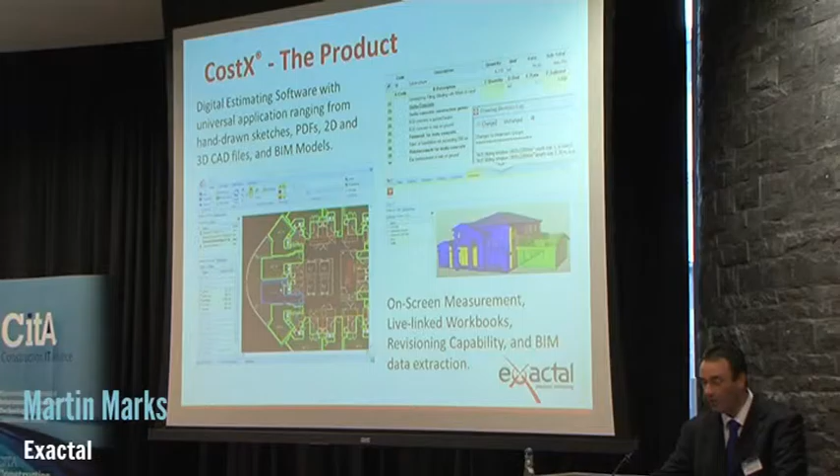Some of the key features of CostX: obviously it allows you to work with and extract measurement information from those file formats. The estimating side takes the form of hierarchical spreadsheet-like workbooks into which all of the measurement data is live linked between the estimate, bill of quant, and the drawings or models from which the quantities have originated. We also have a revisioning capability within the system, which means that when a revised version of a model or a drawing comes out, the quantities can be updated and the live link then updates the workbook.

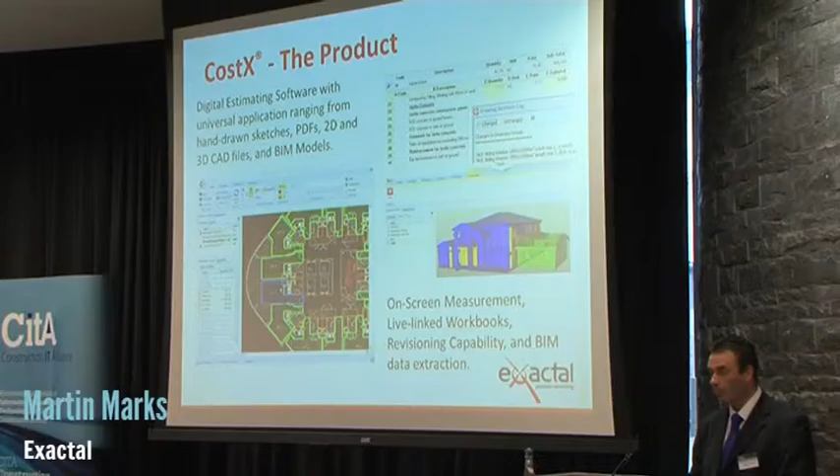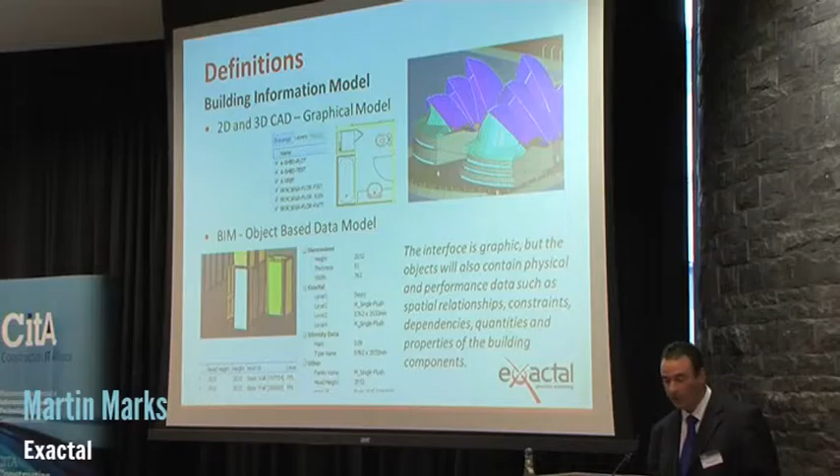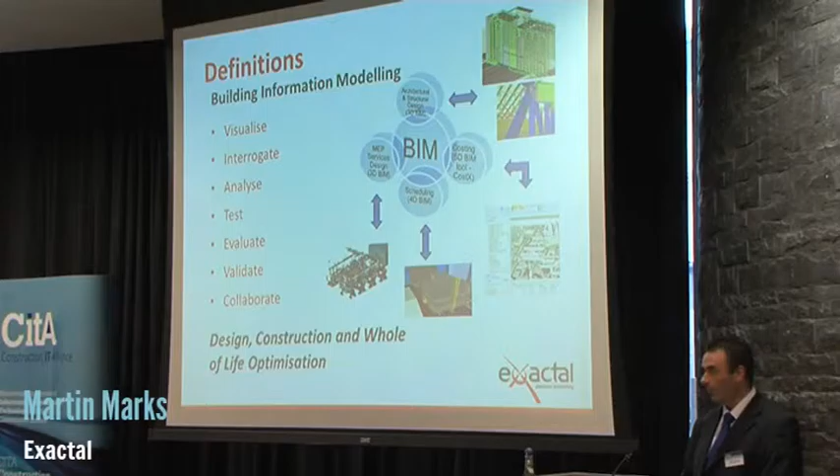So just to talk a little bit about 3D BIM and 2D. In terms of definitions, there are CAD files which could be 2D or 3D. However, a BIM model, so BIM acronym, one of the definitions is Building Information Model. With that, the interface is graphic, but the objects also contain data such as spatial relationships, constraints, and importantly quantities and relationships. Another definition of BIM is building information modelling, which is the process. So just some of the items listed out there. It allows visualization, allows the models to be interrogated, analysed, allows collaboration, all leading to a better design, better construction process, and a better whole life outcome and optimization.

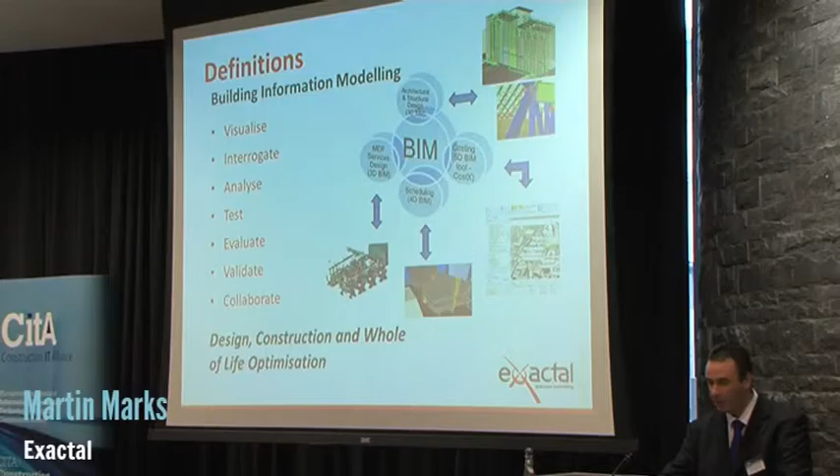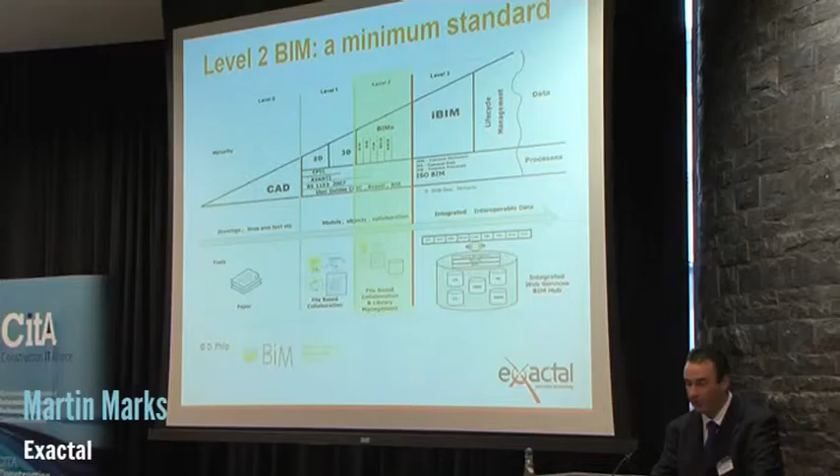We've seen this chart already. The UK government has mandated the use of level 2 BIM by 2016. So just some of the process and deliverables with level 2. There's been quite a lot of talk about the 3D BIM side of things, and COBie's been mentioned. But there's also a requirement for 2D information. For example, where a model isn't sufficiently detailed, or the model doesn't contain objects or object data for certain items that need to be quantified. So there will more often than not be a requirement to ascertain certain measurement information from 2D drawings.

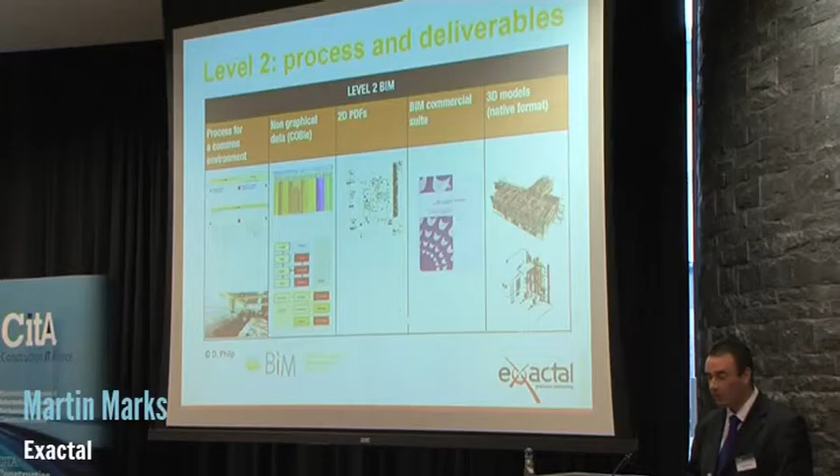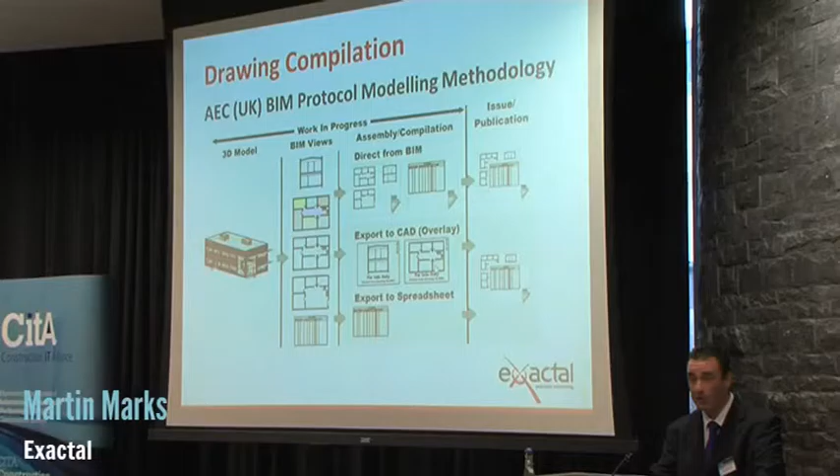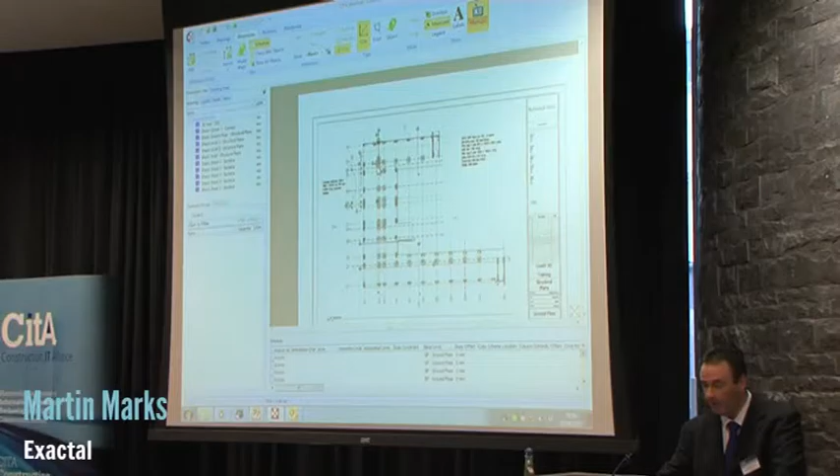So I'm just going to switch now into CostX and just show some of the key features of how we can extract information from the model, and how we can take a number of 2D measurements. So firstly, I've loaded this model in. This model has obviously the 3D view that you can see here. We also have within the same model file a number of the 2D views of the same structure there.

So the model itself, obviously it's made up of a series of objects. If I just look at the object properties, we can see here the model has information contained within it, so there's certain descriptive properties together with obviously certain dimensional properties. And within CostX we can harvest this information.

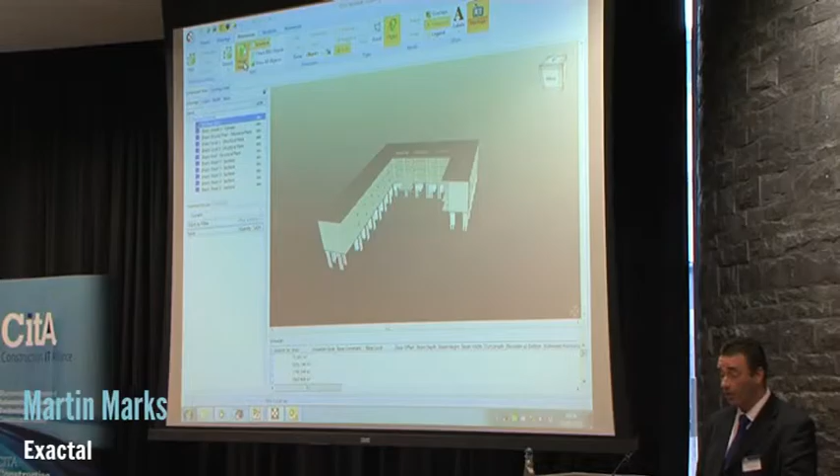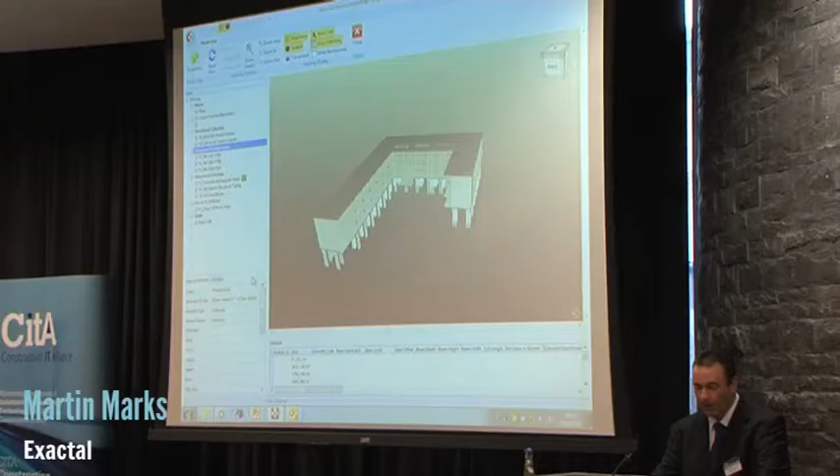So there are a number of ways that we can extract quantity data from the model. We have an automatic process which will just schedule out quantities from the information contained for the objects. We also have a method that we call model maps. Now with the model maps, basically what this allows the user to do is create a customized template with which they can access and abstract the information from the model.

So for example, they can choose which property field or fields they want to utilize to generate the quantities into. So that will determine how discretely or otherwise the quantities are extracted. And additionally, the users can determine which of the property-based values they wish to utilize from the model to generate quantities within the CostX system.

Additionally, they can also generate and utilize formulas within the model map. So that might allow them to derive quantities which aren't inherently included within the model, but can be calculated from a combination of the other properties. So the model map is comprised by creating a model map entry for the various required nodes within the model tree structure.

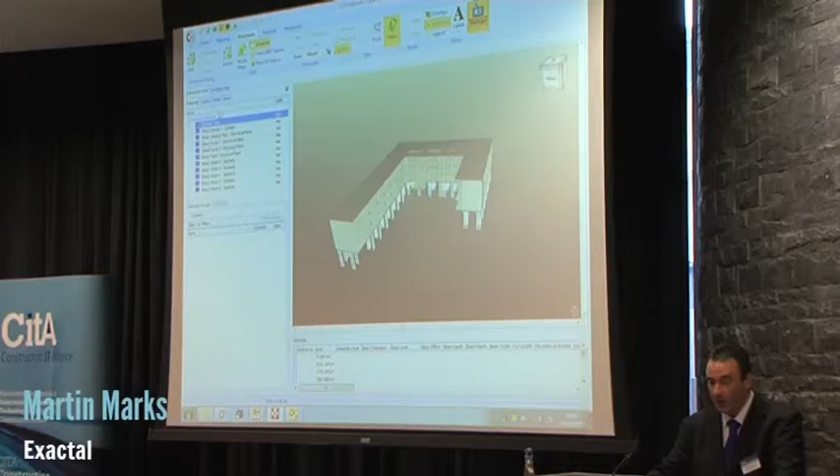So when the model map has been produced, we can then import quantity data from the model, and this can be done in a number of ways. Firstly, the user can import data on a selective basis. So, for example, I've isolated the floor items here, and if I just import the quantities at this point, you can see what that has done is created, in this case, 5 dimension groups which detail out the quantities for my various objects which were shown. So that was the floor objects.

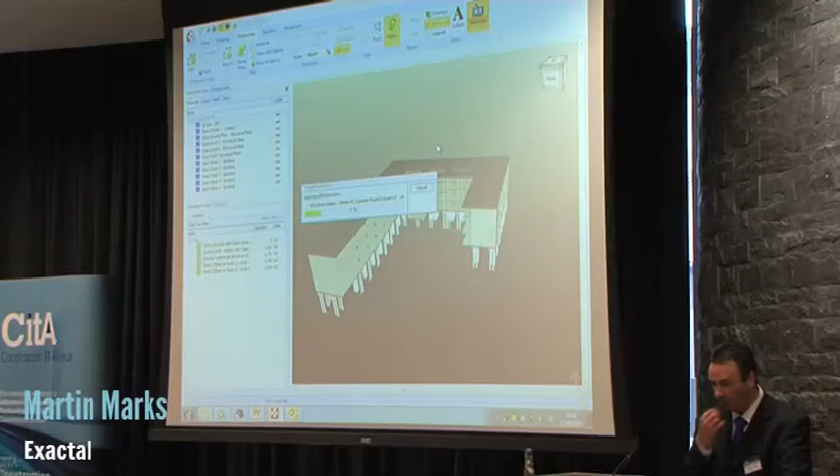Of course, if the entire model was displayed, then we can import quantities for the entire model en masse. So this is just running through and pulling in quantities which you'll see appear as dimension groups within the lower left-hand corner here in just a second. So if I just expand out these folders that contain the various dimension groups, we can see here we have the quantity data which has been generated from the model.

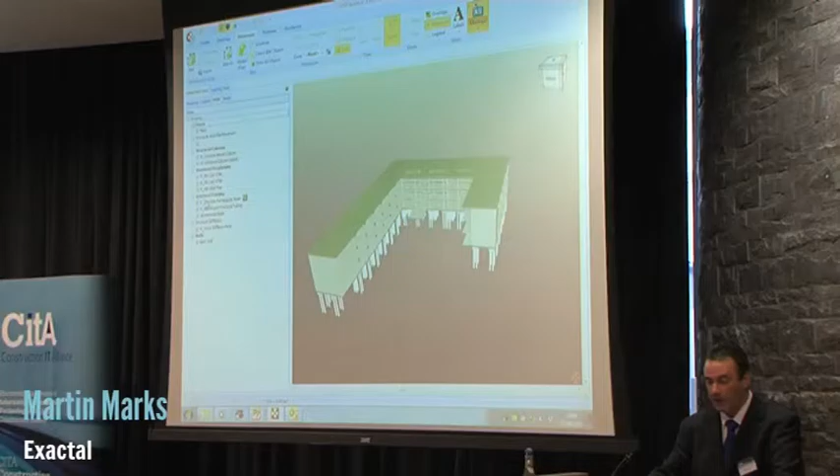Now, in addition, the user can also export a copy of the schedule data into Excel. And within Excel, the user can then add their own properties and their own data to the objects. So in this particular model, I have added data for the likes of the beam depth, beam height, beam width, and such like. When that data has been added within the model, that too can be accessed and used to generate quantity information with the model map.

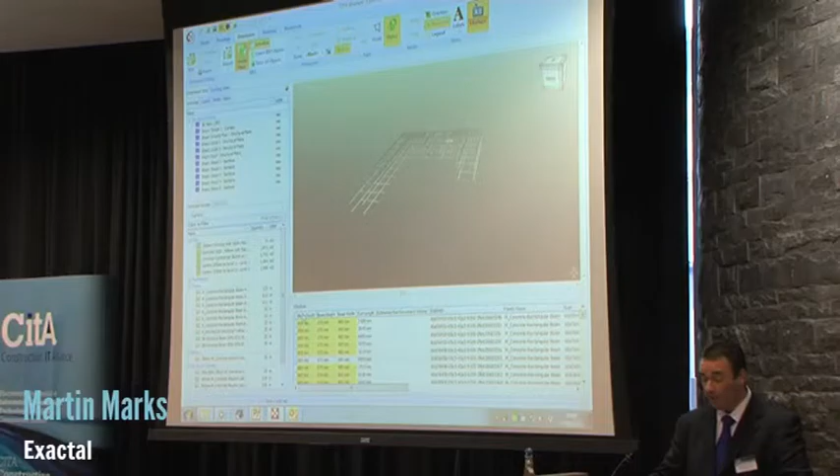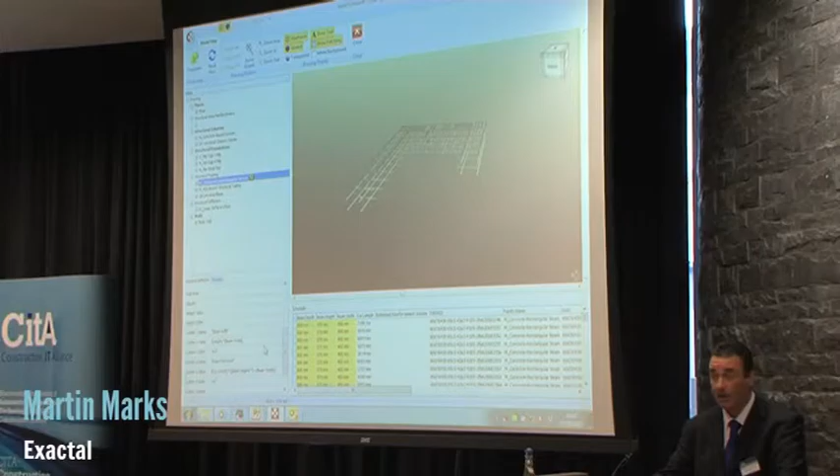So I've created a model map to utilise that to generate my beam formwork data. So within this model map, I've basically utilised the additional data which I've added to calculate my beam formwork quantity data. So if I now import using that model map, we'll see in a moment we'll get an additional folder which will be created together with the dimension group containing the information I need to quantify my formwork items.

So there's my folder, and here we have the dimension group which was created using the additional data which I added to the model. So you can see there from the pop-up hint, I've calculated my beam soffit and my beam formwork data.

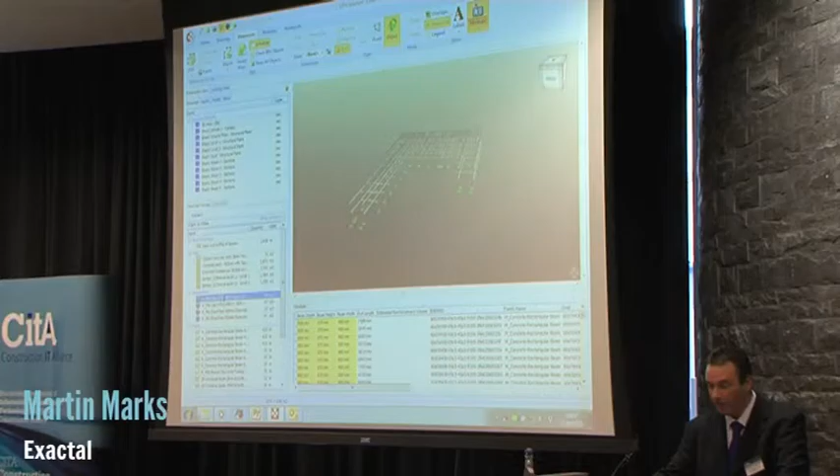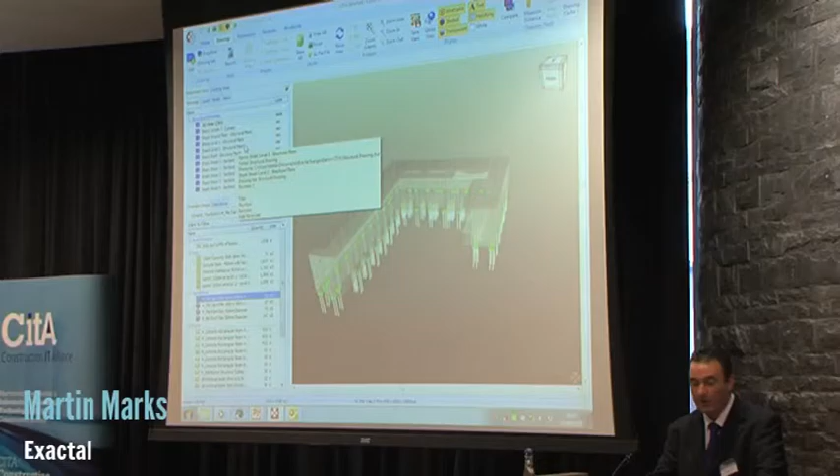Now, additionally, because we loaded a set of drawing files, including both the 3D file together with the 2D sheets, let's close the schedule and show all objects. So where we have objects that we've imported from the 3D model, you can see the objects shaded green there that we imported from this model. Where they exist on any referencing 2D views, such as the ground floor structural plan, that will then display those items on the 2D views as well.

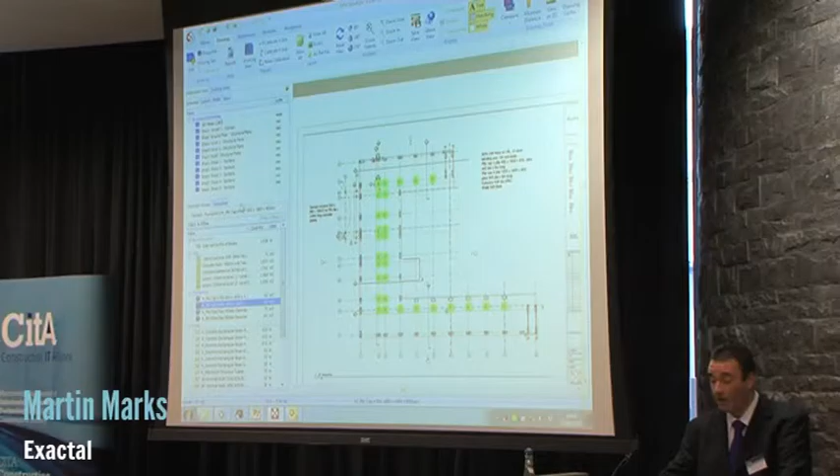And if I switch to the 4-pile cap, it will highlight those items within the drawing file. Now, in addition, it's also possible to measure in a 2D sense as well. So if I just simply create another dimension group here, I'll just call it roof finish. And I'll put it in a folder called roof finish.

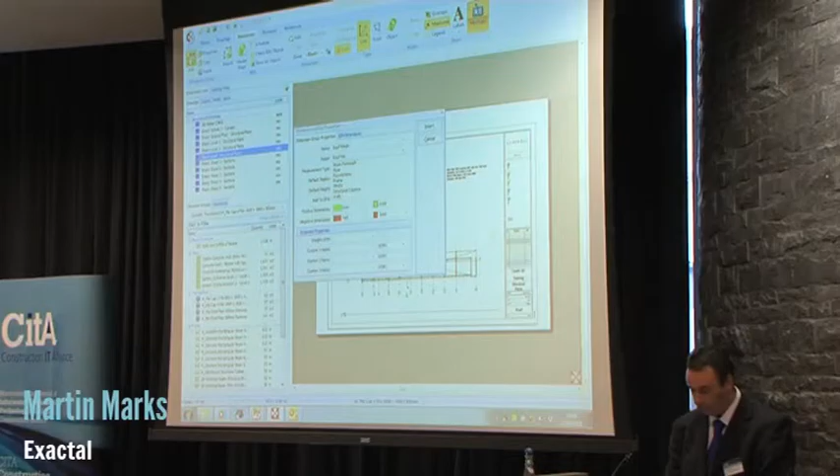So here's a dimension group I've created, and if I now want to extract measurement information, I can capture areas, and if I need to make the deductions, I can obviously deduct out those voids as well, which will enable me to generate measurement data directly by measuring from the 2D drawing files.

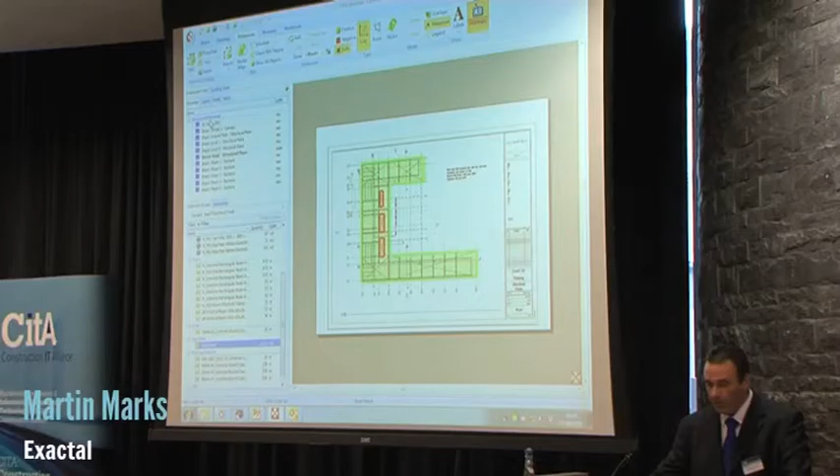So just in terms of the measurement data that we've generated, this measurement data can then be dragged and dropped and utilised within the workbook system within CostX. So this is a workbook which I've already created. If I just open this up, you can see here I've created a bill of quantities, and I've utilised my quantity data from the model.

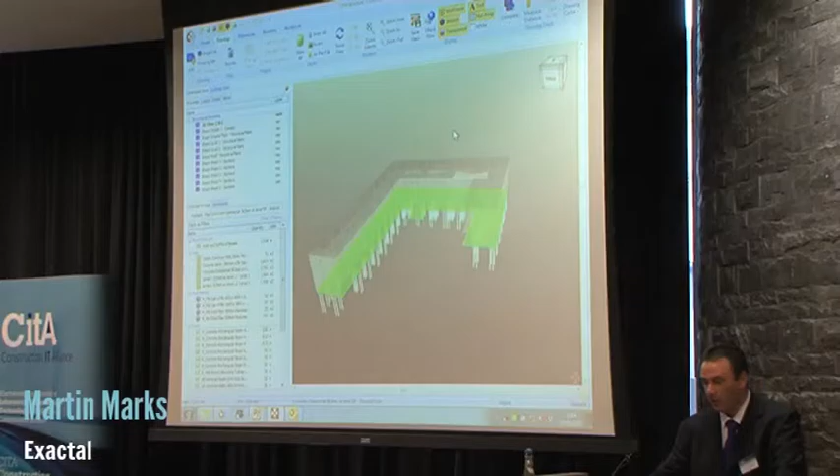Now the information is live linked, so from the quantity where it's utilised within the workbook, we can click on the Show Source button, and that will revert us back to the dimension view. It will load the model, and it will display which object that quantity originated from.

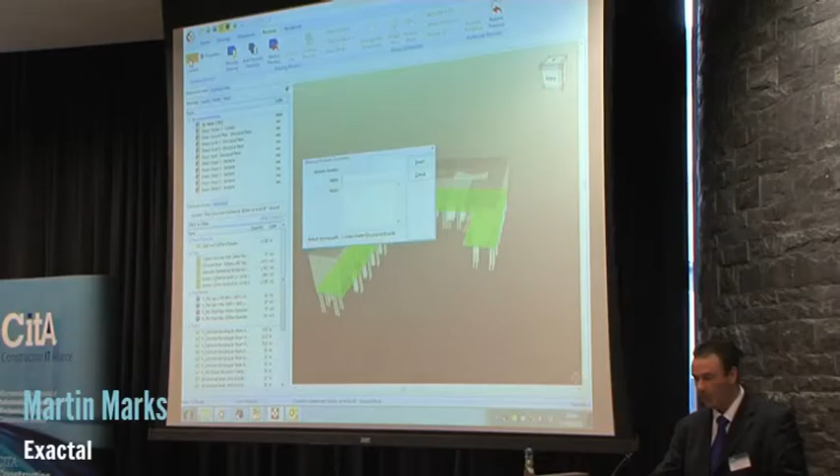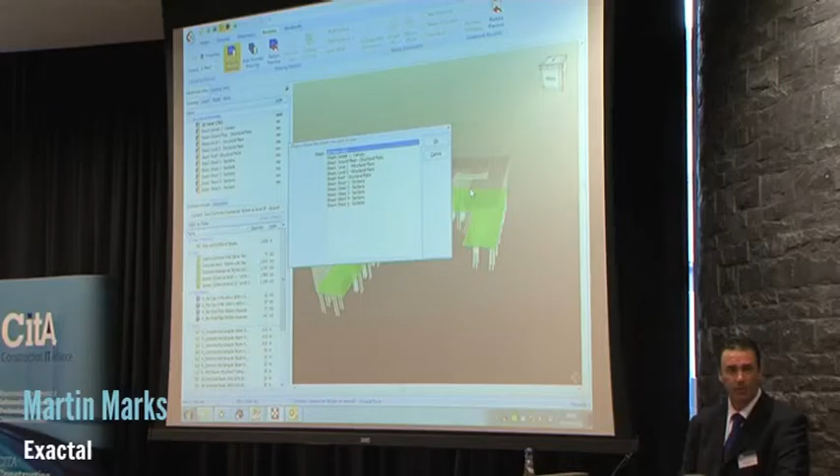Now, in terms of the revisioning side within CostX, let me create a revision to this job. Just call it revision 2. So what we can now do is we can promote the model with the new version. So, for example, when the next iteration of the model is derived, we can load this into CostX as a revision. This will initially zero out the quantities for the dimensions that we imported from the previous model file, and we can simply just update those.

So this currently is reading through the existing objects that we imported into the previous dimension groups, and it's just updating the quantity information for them. Now, when we have a revision to the model, we can also review the changes, and the changes can be reviewed graphically on screen.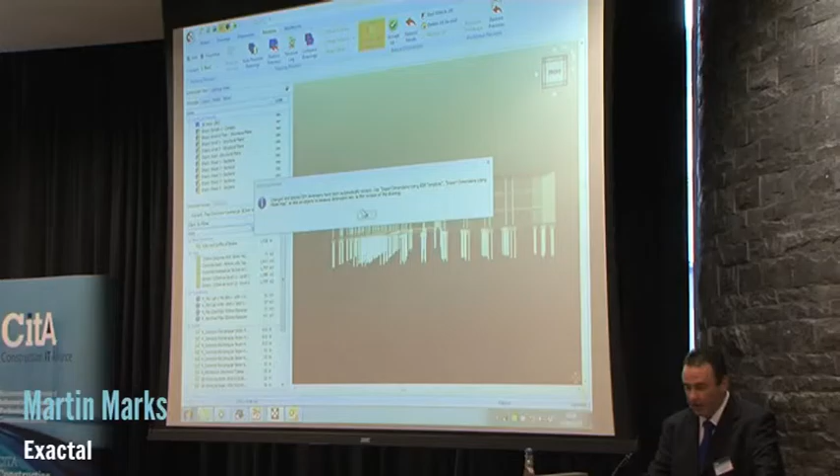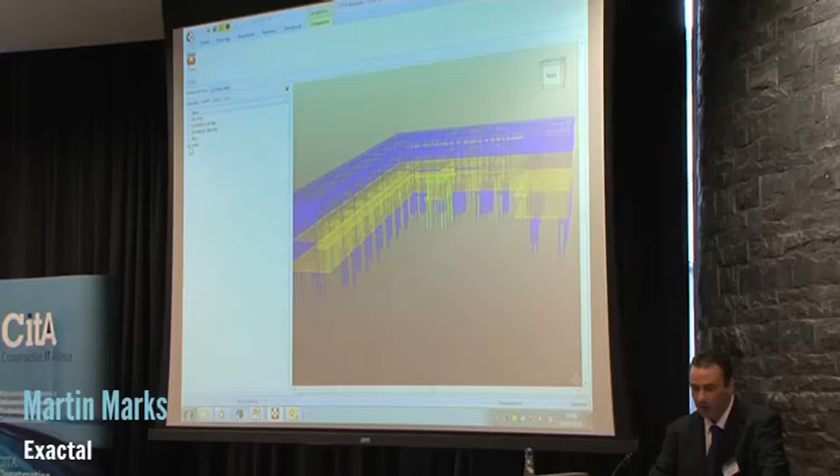So if I just compare back to the previous revision, what this does is it uses a simple colour system. For example, objects which are new in the revised model are highlighted in green. Objects which have been deleted, such as these piles here, are highlighted in red. Anything which has remained the same is highlighted in blue. And we can turn on or off the view of these objects just by using a tick box system here. So we can visually review the changes to the model.

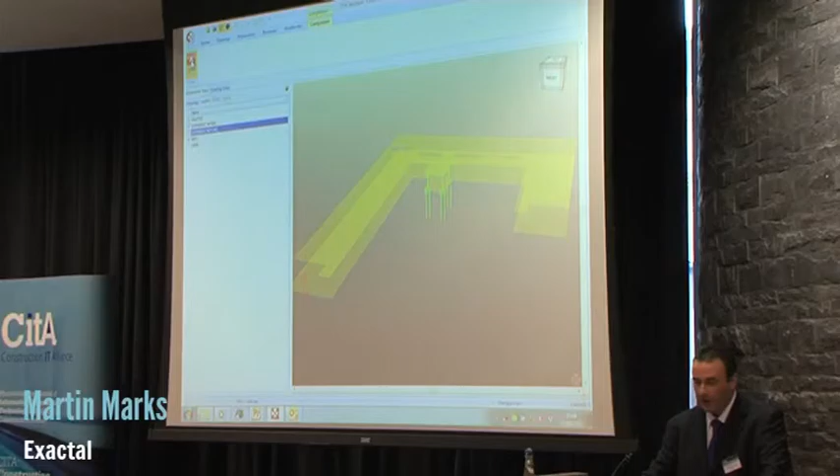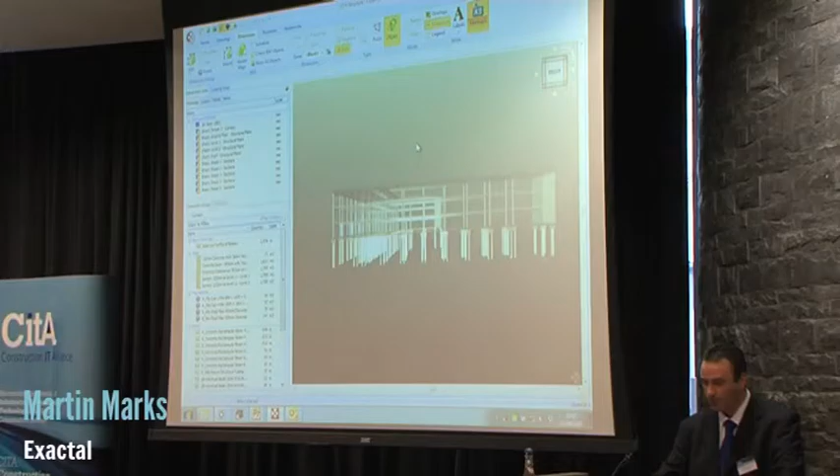Now, to pick up new items, we can just run the same process that we utilised initially to generate the original quantities. So this is now just picking up any new objects within the model. So, if I now switch to my costing view, I can simply promote this workbook. And this will update the quantities by virtue of the live links. So the overall value that drawing represents is increased by, in this case, approximately £30,000.

So we can also generate a report. So if I just generate a top-level report here, and click on the preview button here, we can see from this report the piling element has increased by approximately £12,000. The formwork increased by approximately £9,000 there. And we can also review the detail to that information as well.

So this is now going into the detail changes. So if I just scroll down here, we can see in the piling there's 8,400 in the 400 piles, and we can step through all of the detail and review it.

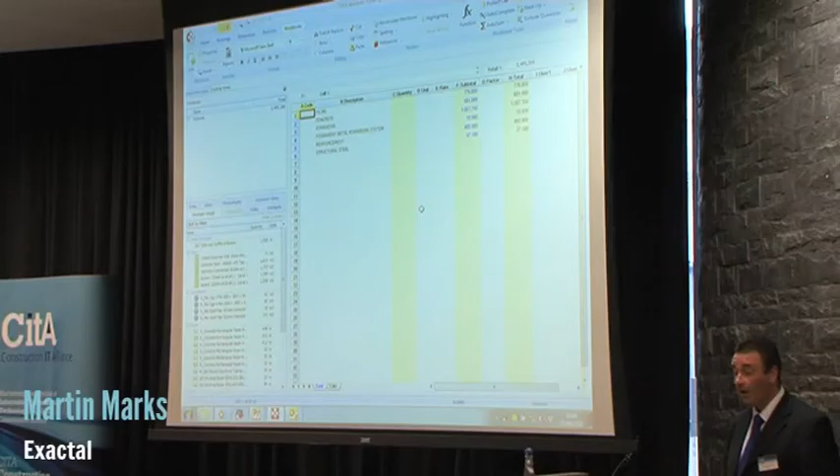So that's just a little bit on CostX: how we can load models, how we can extract the quantity data from them, how we can additionally supplement measurements from 2D drawings as needed, and how when a revision to the model comes along we can very easily and quickly create an incremental revision to our workbook, our costing information.

So part of our corporate objective is to maintain our position as a technology innovator and an industry leader. Thank you very much.